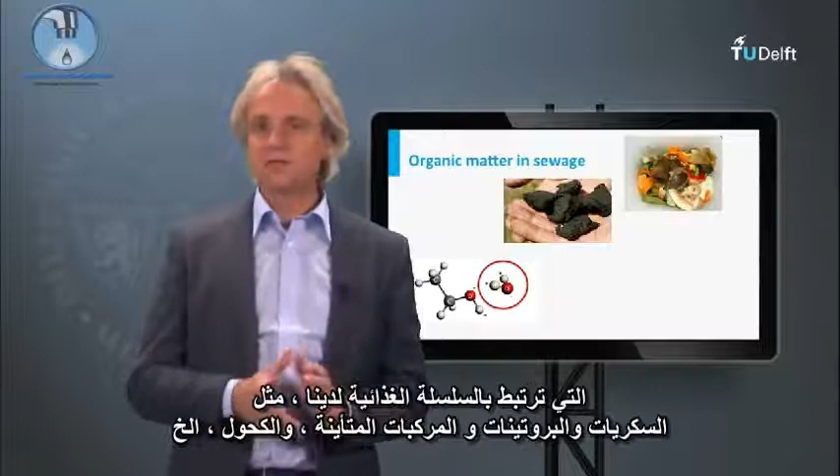The largest fraction of contaminants in domestic sewage consists of organic pollutants. Since water is a polar compound, it's an ideal solvent for many organic pollutants that are associated to our food chain, such as sugars, proteins, ionized compounds, alcohol, etc.

Can you think of an organic compound that hardly dissolves in water? Maybe fats. The lower the polarity of a compound, the lower the solubility of that compound, but we still find them back in our sewage and thus in our treatment system.

In addition to dissolved compounds, the used water carries a lot of suspended matter. These suspended solids can be of organic nature, such as food left over thrown in the kitchen, or fecal matter from our toilets, but also they can be inorganic, such as clay and sand particles, or when flows are high, even small stones.

Water is mostly used for transport of reactants to and transport of contaminants from the site of industrial and/or agricultural production or household appliances. The carrying capacity of water is determined by a number of factors. Some of them are related to the physical-chemical nature of the pollutant, such as the polarity of the compound, the maximum solubility, the degree of ionization, etc.

Others depend on the type and extent of the sewage system, local weather conditions, and thus flow velocities in the conveyance pipes. Now think for yourself and imagine at least 10 compounds that come back to your mind that you certainly will find in the sewage.

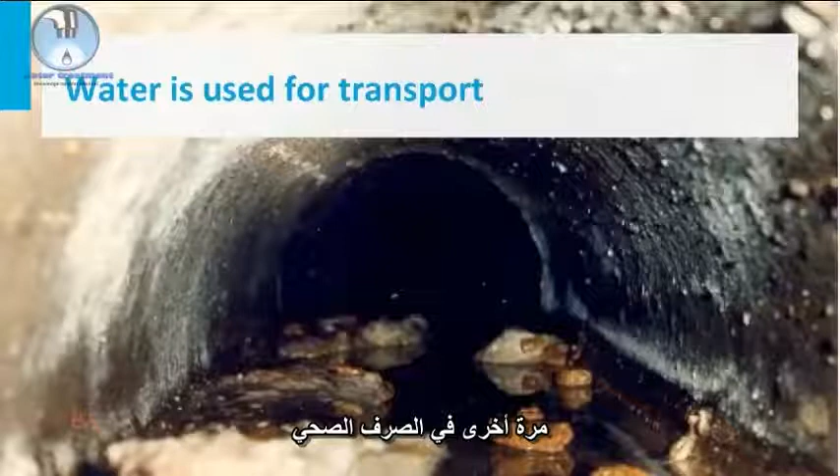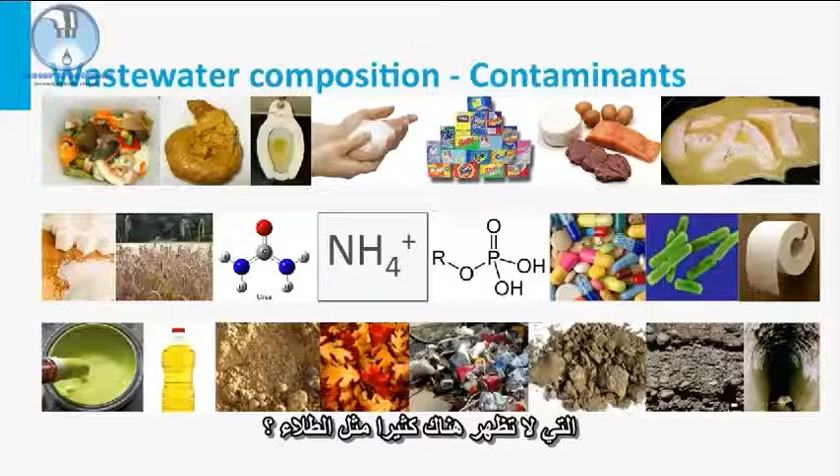Kitchen waste, fecal matter, urine, soaps, detergents, proteins, fats, sugars, fibers, urea, ammonium, phosphates, medicine rest, pathogenic bacteria, toilet paper, chemicals that don't belong there, such as paint, vegetable oil, sand, leaves, tree dust, clay, stones, mice, rats, everything. I guess that matches more or less with your imagination, right?

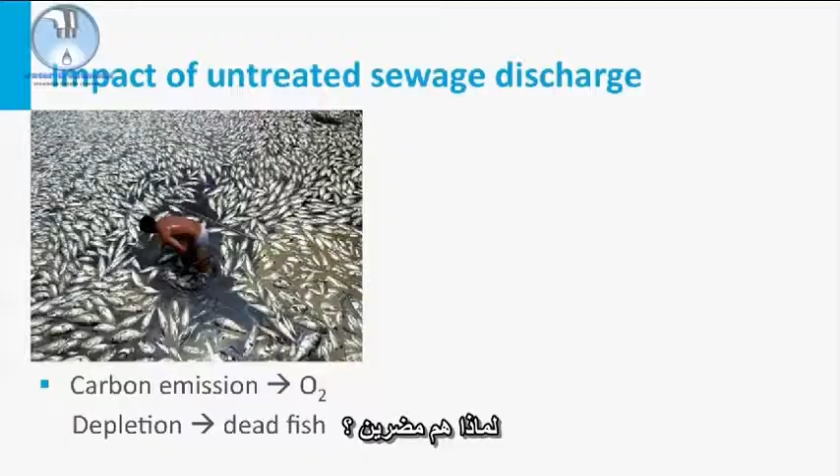Now the question, why should we remove these compounds? Why are they harmful? Discharge of organic compounds leads to surface water pollution, possibly resulting in oxygen depletion. The actual impact on the dissolved oxygen concentration depends on the composition and concentration of the specific compounds, as will be discussed during the coming lectures.

Since the exact nature of the organic compounds is not known, organic matter is determined in analytical tests. Based on the type of test, the organic matter content is expressed in gram chemical oxygen demand, or COD, or gram biochemical oxygen demand, or BOD. The fundamental background of these tests will be discussed in another lecture.

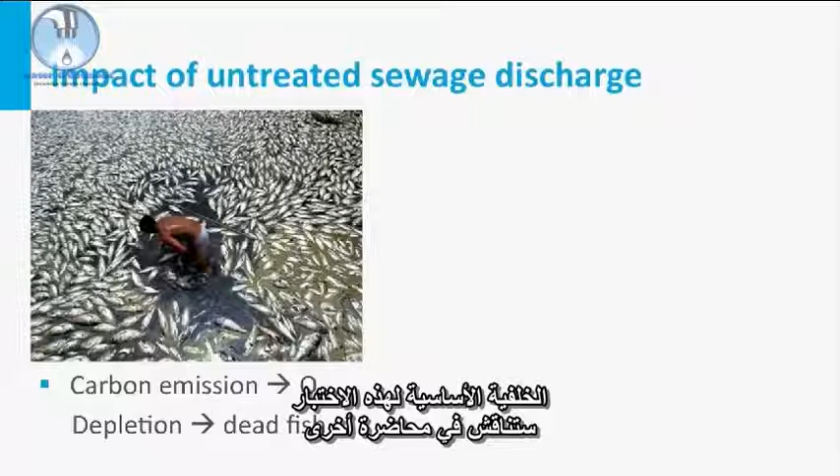In addition to carbon pollution, the sewage is full of nutrients, nitrogen and phosphorus. The presence of these fertilizers in surface water leads to eutrophication, resulting in high algae growth or algae bloom. By the massive growth of algae, other species will hardly have the chance to flourish in these waters, thus leading to a loss in species diversity.

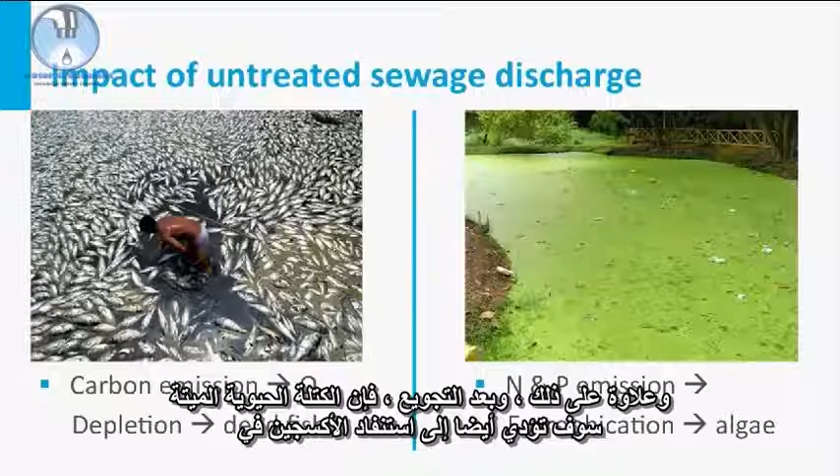Moreover, after starvation, the dead biomass will also lead to oxygen depletion in the receiving surface waters. Therefore, effluent restrictions of sewage treatment plants generally include both organic matter and the nutrients. The natural carbon, nitrogen and phosphorus cycle, as well as the imbalances in these cycles, will be explained in much more detail when we discuss the biological processes in sewage treatment plants.

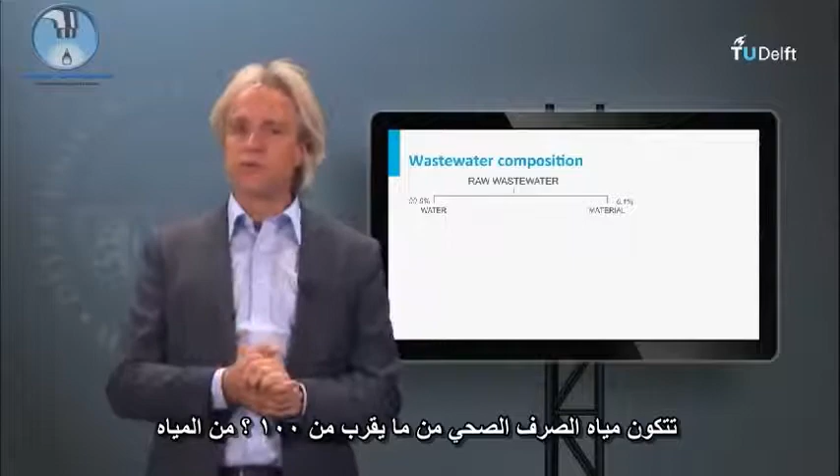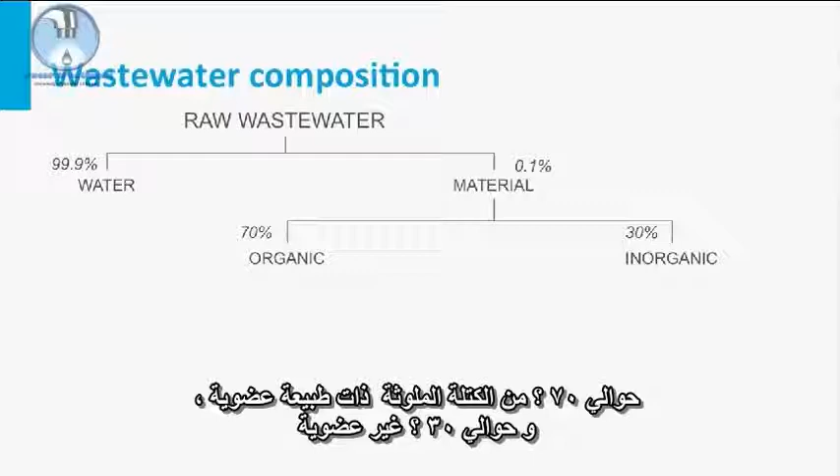Back to the wastewater. Wastewater is composed of almost 100% water. The polluting mass is only a very small fraction of the total mass. Of the polluting mass, about 70% is of organic nature and about 30% is inorganic. The organic fraction consists of 65% proteins, about 25% sugars and about 10% fats.

Local conditions may differ distinctly from these average values. The inorganic fraction consists of sand and grit, salts and metals. Part of the pollutants are present in a soluble form, whereas a large part is suspended. How do we quantify the solids that are present in the sewage?

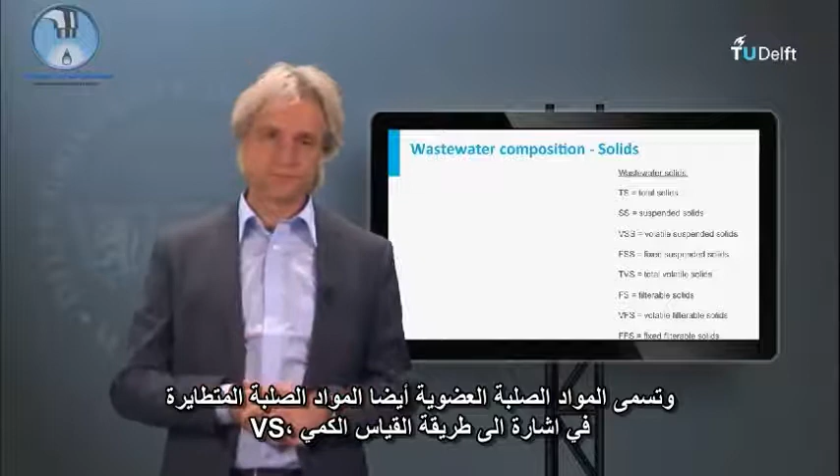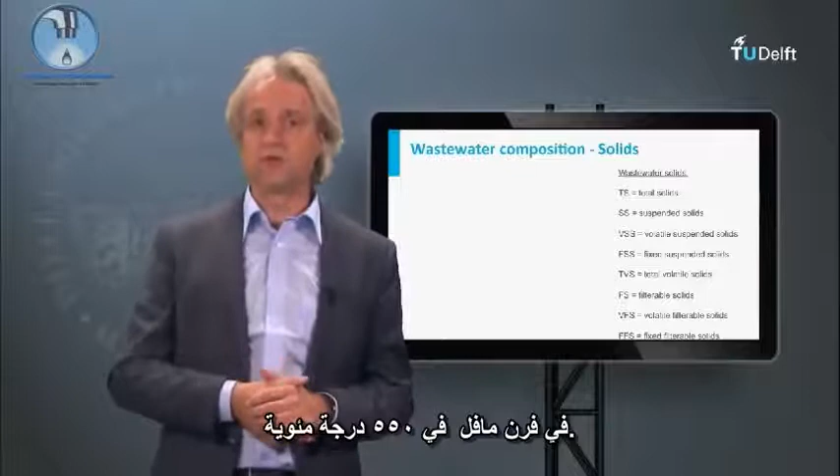Suspended solids quantification is based on their settleability, their size and their organic or inorganic nature. Organic solids are also called volatile solids or VS, referring to the way of quantification. Organics are separated from the inorganics by burning the solids or volatilization in a muffle oven of 550 degrees Celsius. The non-volatile fraction or ashes are called the fixed solids or FS.

A rough classification of the solids present in the sewage is given in this slide. Now let's start with a sewage sample and first check what part of the solids is settleable. The settleability of the solids is an important characteristic when we apply downstream solid separation. Under standardized conditions, the amount of settleable solids is determined by using an Imhoff cone.

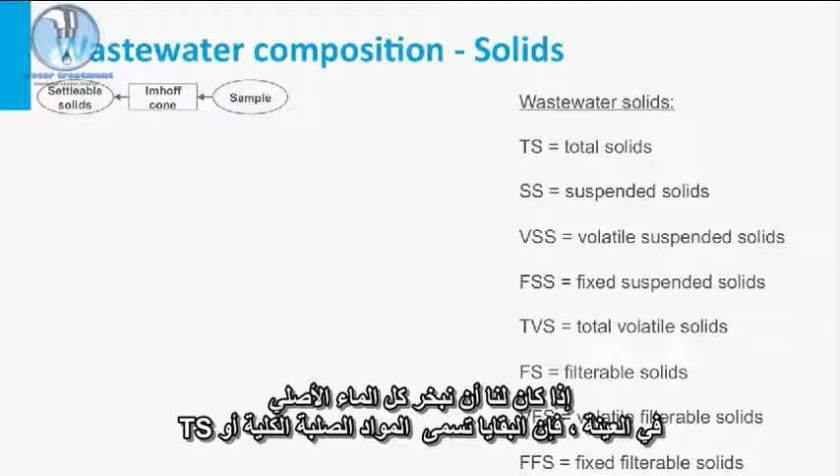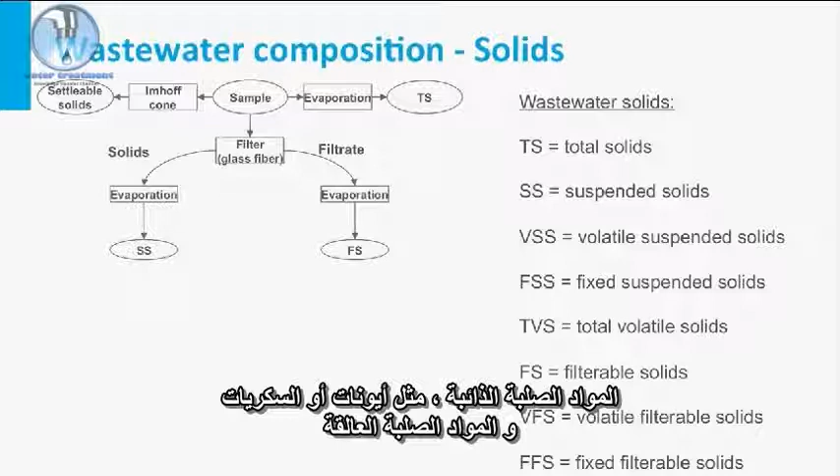Alternatively, if we evaporate all the water of the original sample, the residue is called total solids or TS. By means of a filter with a certain mesh size, we may differentiate between the filterable dissolved solids, like ions or sugars, and the suspended solids. If we burn the solids fraction in the muffle oven of 550 degrees Celsius, we obtain the volatile suspended solids or VSS and the ashes or fixed suspended solids or FSS.

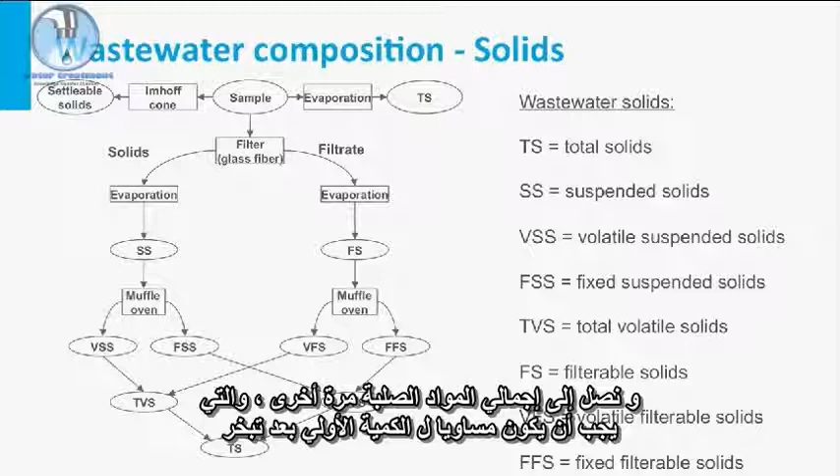The oven-treated filterable fraction will give us the volatile filterable solids and the fixed filterable solids. Now, by summing the appropriate fractions, as shown in this slide, we can close the mass balance and we come to the total solids again, which must be equal to the initial amount after evaporating all the water. A practical example is given in this slide. Just have a close look and stop this video and do these simple calculations by yourself.

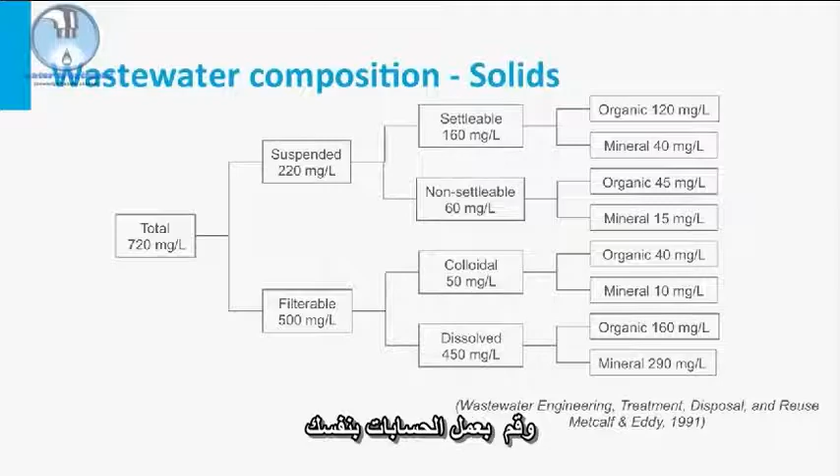The characterization of sewage is important to understand what impact the discharge of untreated sewage will have on the environment. Alternatively, sewage characterization is performed in order to be able to dimension a sewage treatment plant. The sewage characteristics are firstly dependent on the type of collection system or sewage system that we apply. Flow rates and expected fluctuations herein depend on the extent of the sewerage and whether rainwater is collected by the same system, as we discussed in the previous lecture.

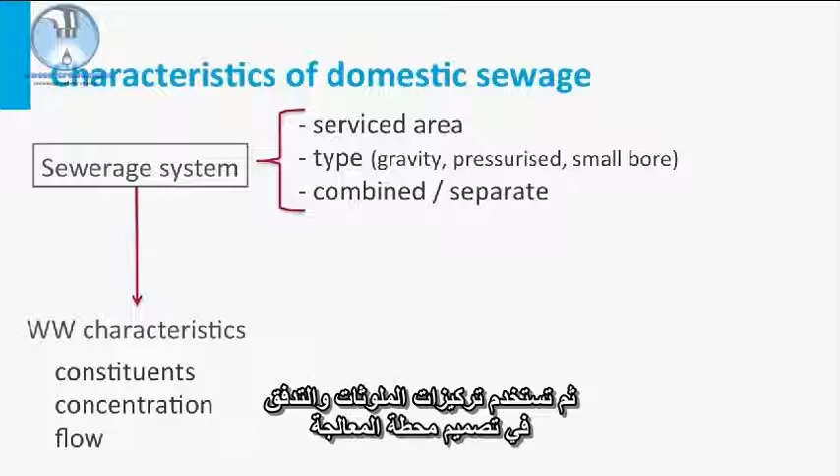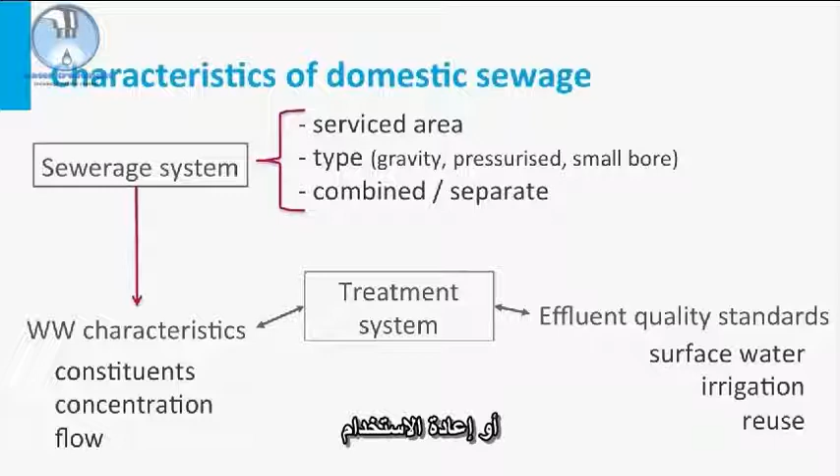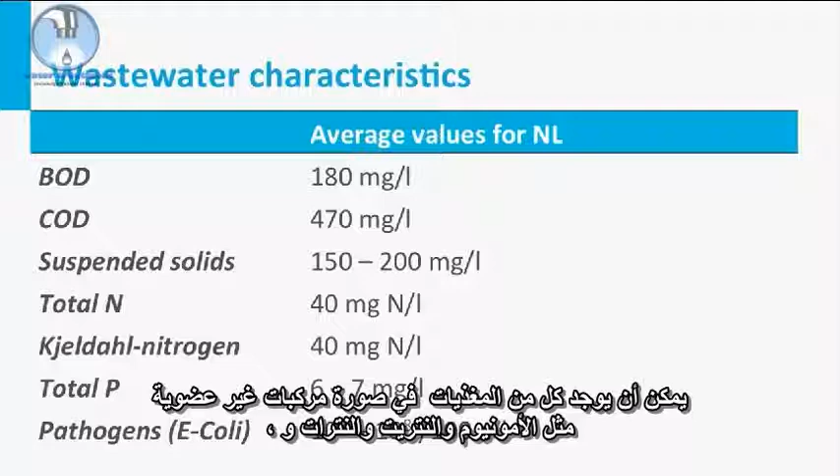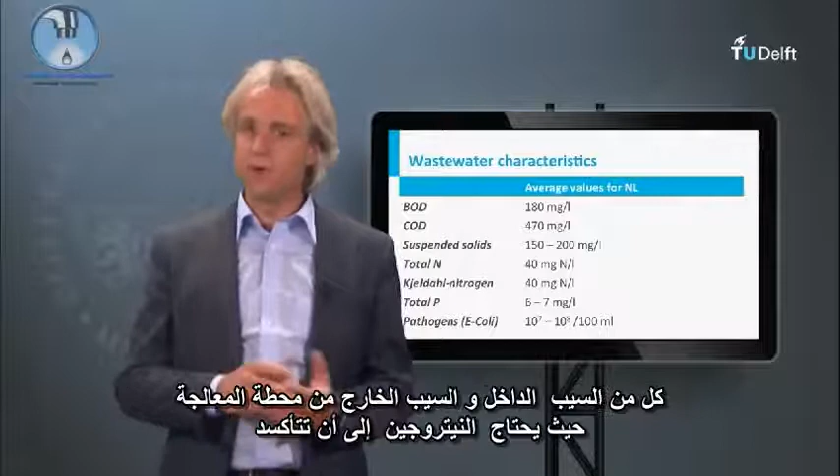Both nutrients can be present as inorganic compounds such as ammonium, nitrite, nitrate, orthophosphate, or they are bound to organic matter. Particularly the presence of reduced nitrogen compounds needs to be carefully assessed at the STP in both the influent and the effluent, since reduced nitrogen needs to be oxidized in the reactor before discharge to the environment.

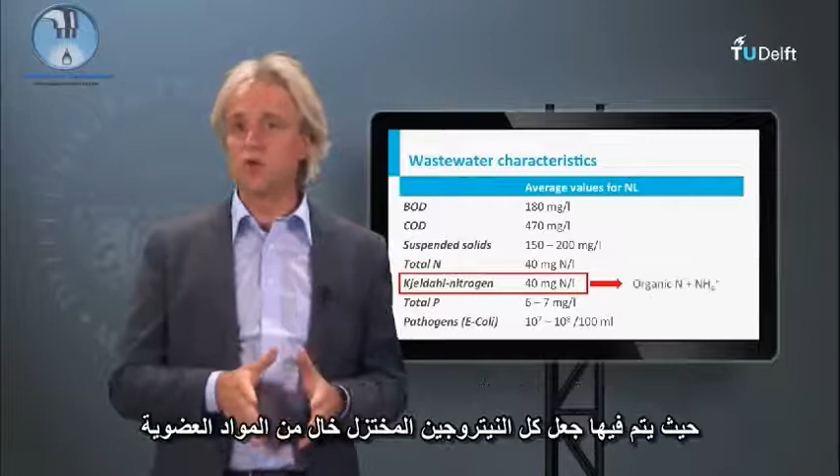The total amount of reduced nitrogen is measured by the Kjeldahl method, a destructive technique in which all reduced N is made free from organic matter. The released organic N, as well as the ammonium, is measured in this test. What does it mean that the concentration of total N and Kjeldahl N are about the same in the sewage?

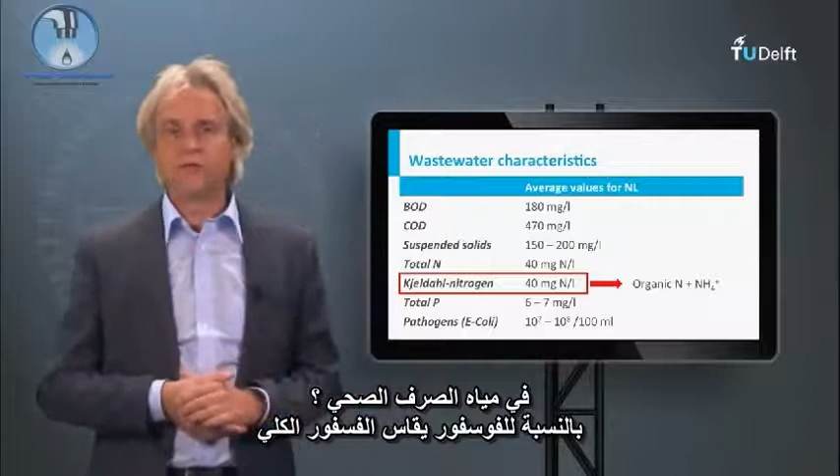For phosphorus, generally total P is measured, which includes both the phosphorus bound to the biomass and the free reactive orthophosphate. Our sewage can be characterized as dilute, having the following average concentrations: BOD of 180 mg per liter, COD 470, Kjeldahl nitrogen 40, total N 40, total P 6 to 7, and suspended solids 150 to 200. The large presence of suspended solids in the influent indicates the rather complex nature of organic pollutants entering an STP.

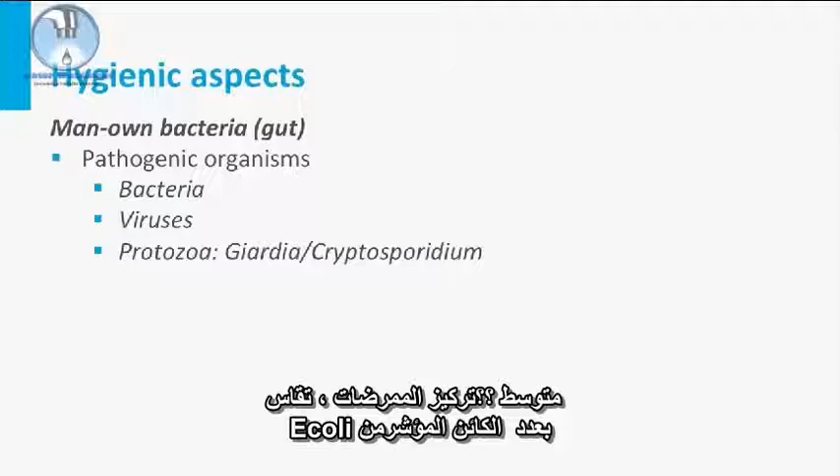Next to the biochemical compounds, the influent is contaminated with huge numbers of human pathogens. The average pathogen concentration, measured as the number of indicator organisms, E. coli, is about 10^7 to 10^8 per 100 ml. In addition to E. coli, the influent contains high numbers of other bacteria, viruses, and protozoa like Giardia and Cryptosporidium.

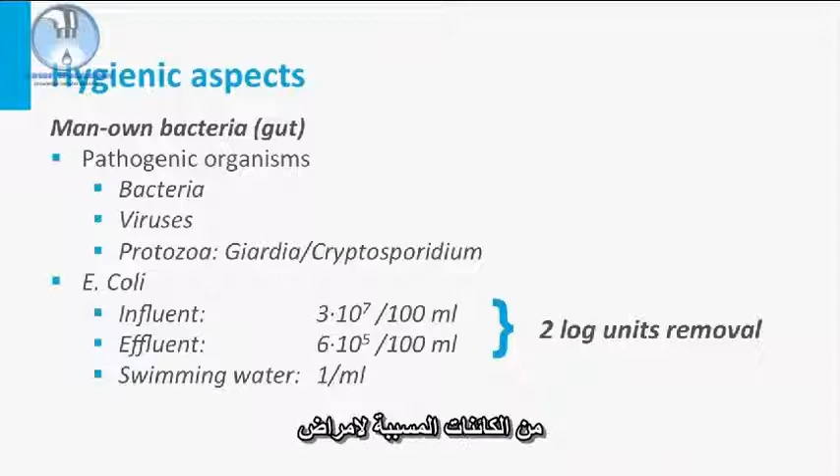During activated sludge treatment, no more than 1 to 2 log units of pathogenic organisms will be removed. Notably, pathogens are not removed in our sewage treatment plants. Only in those cases where the effluent is discharged to surface water where public bathing is allowed, pathogens need to be removed to less than 1 per ml.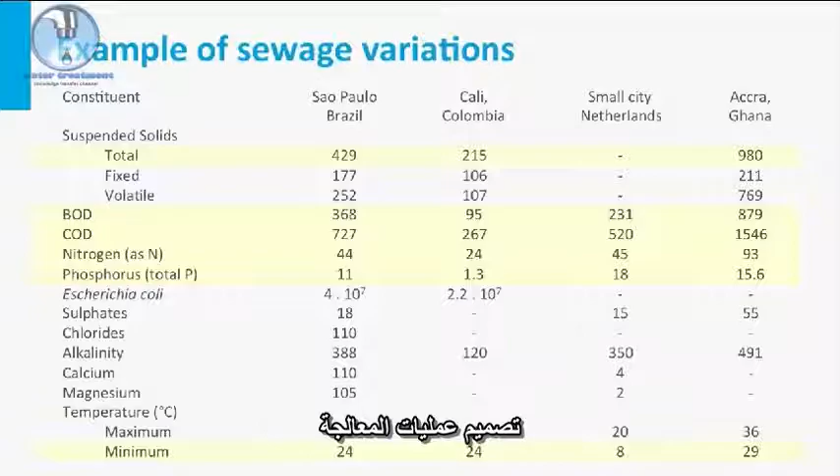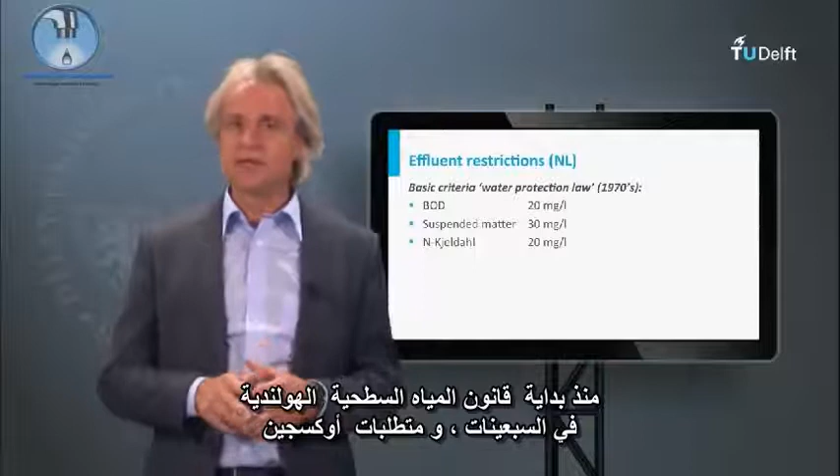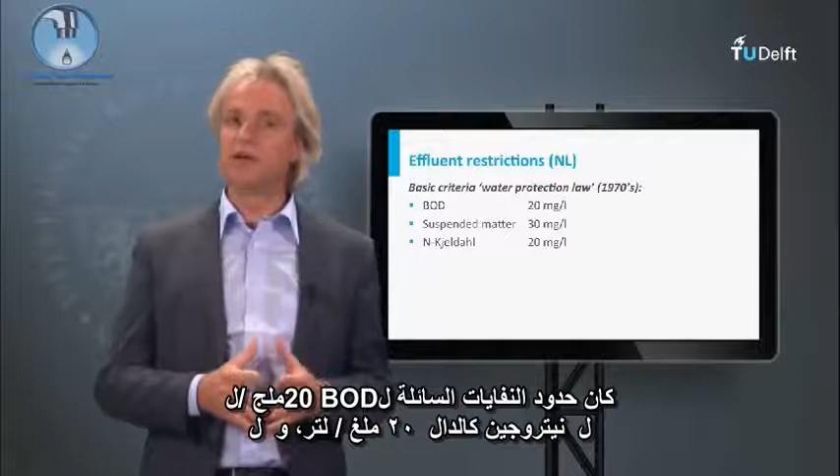And what are the criteria that should be reached in the effluent of the STP? Since the installment of the Dutch Surface Water Act in the 70s, the oxygen-requiring pollutants and suspended solids were restricted for discharge. Effluent restrictions for BOD were 20 mg per liter, for Kjeldahl nitrogen 20 mg per liter, and for suspended solids 30 mg per liter.

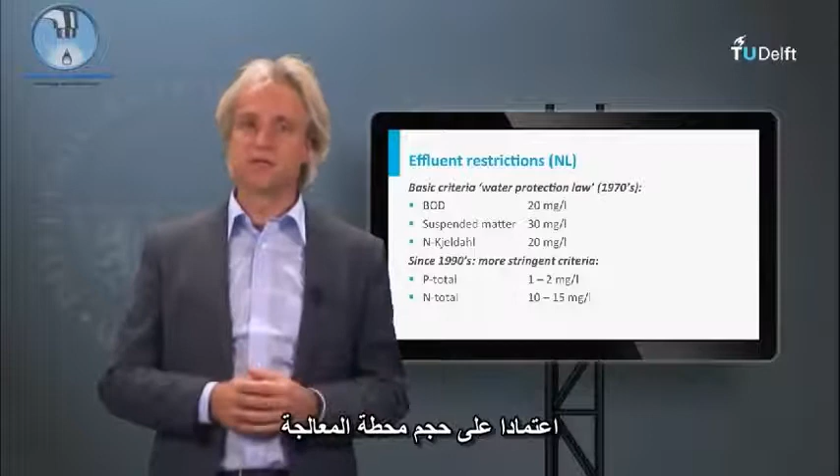In the 1990s of the past century, restrictions for nutrients were adopted, resulting from international agreements as outlined in the North Sea Treaty. Effluent restriction for phosphorus was set to 1 to 2 mg P per liter and nitrogen to 10 to 15 mg N per liter, depending on the size of the treatment plant. As a result of the stringent nutrient criteria, the effluent BOD concentrations dropped considerably.

At present, the effluent nutrient concentrations are revisited as outlined in the European Water Framework Directive, particularly for large STPs and those STPs located in ecologically sensitive zones. In various STPs in the Netherlands, effluent nitrogen and phosphorus concentrations already need to comply with lower standards, as low as 2.2 mg N per liter and 0.15 mg P per liter.

These are being discussed, which will put a very high pressure on all operational STPs. For practical reasons, 5 mg N per liter and 0.3 mg P per liter are the more stringent criteria for nutrients which are now being adopted in the Netherlands.

Other health and environmental concerns within our current sanitation system include the increasing presence of priority pollutants, medicine residues, and endocrine disruptors in the effluent. Also, residual chlorine in the effluent when applied, or volatile compounds leaving the treatment plant with aeration, are compounds of concern, but they are not yet in the effluent restrictive guidelines.

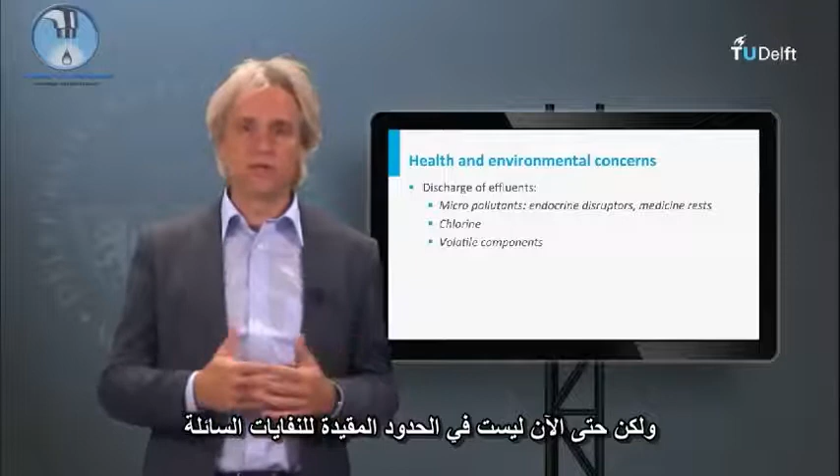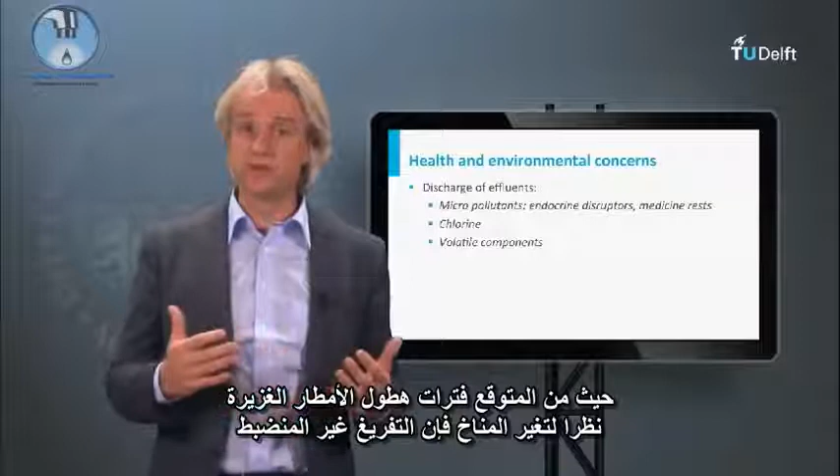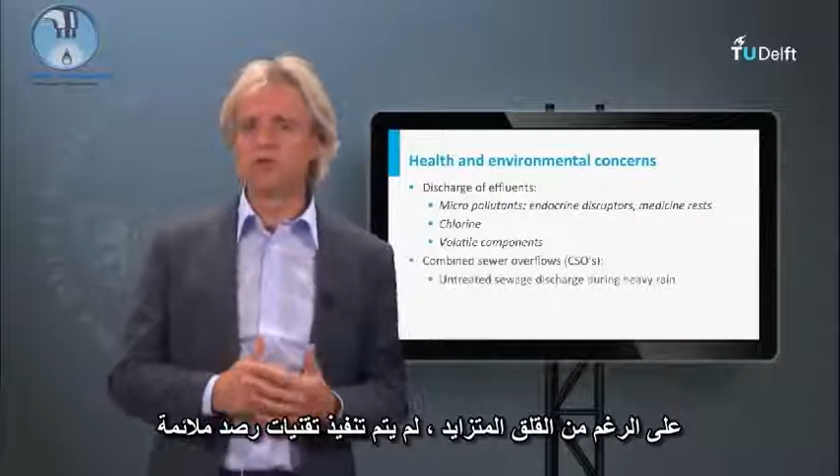As discussed in our previous lecture, heavy rainfall may result in combined sewer overflows or CSOs. Since more periods of heavy rainfall are expected owing to climate change, uncontrolled discharge of dilute, non-treated sewage is a growing concern. Despite the growing concern, appropriate monitoring techniques for the mentioned discharges are not yet implemented, and so far it is not yet known how these compounds will impact our drinking water resources in the future.

Let's check for the fundamental aspects of the COD and BOD measurements in our next lecture.